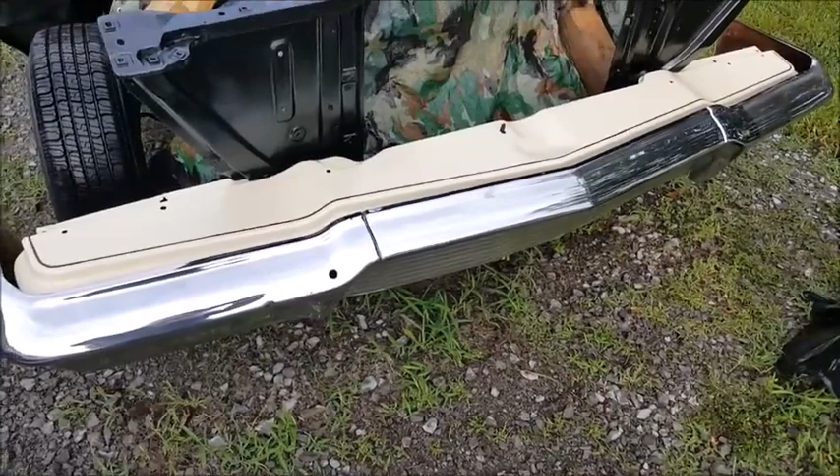Rained here in Middle Tennessee today, but a couple days ago I laid that valance off over in there. Oh, I just wiped it off there with the cloth. Maybe a little rain. But that's what we ended up with.

And we'll get that grill bolted in there in a couple of days. Get all energetic, enthused.

A lot of rain here in Middle Tennessee today, man, a lot of rain all at once. That front valance we was working on the other day, that's what we ended up with. That's that enamel with that one shot enamel painter on the valance, and that one shot lettering enamel there to run that stripe around through yonder. You know, just simple. We get that grill bolted on there, might make sense.

1963 Chevrolet Impala. And 1963.

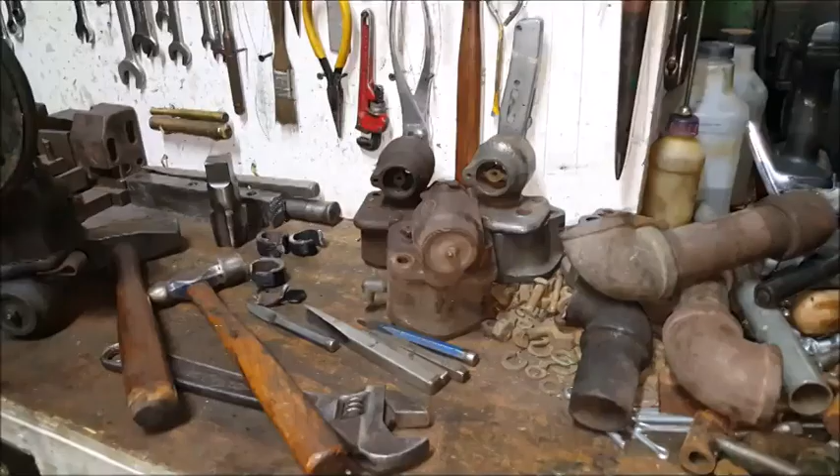Well, you know, scored them 3 heads up there at Tri-State, up there at Portland, you know. That's the remnants of them sawed off 90-degree elbows they used in exhaust system.

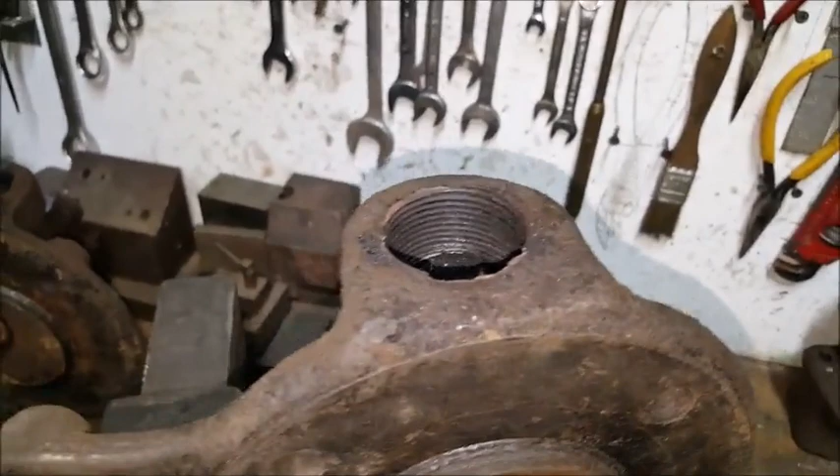And that's the condition of the thread there. Once I done it, had at it with that Cape chisel. I done run a tap down in there, 1.25 inches. But yeah, that's acceptable, you know what I mean? Right there, kind of kissed the side a little bit right there, but I'd still turn that in for grade, you know.

My little Cape chisel work here on the bench.

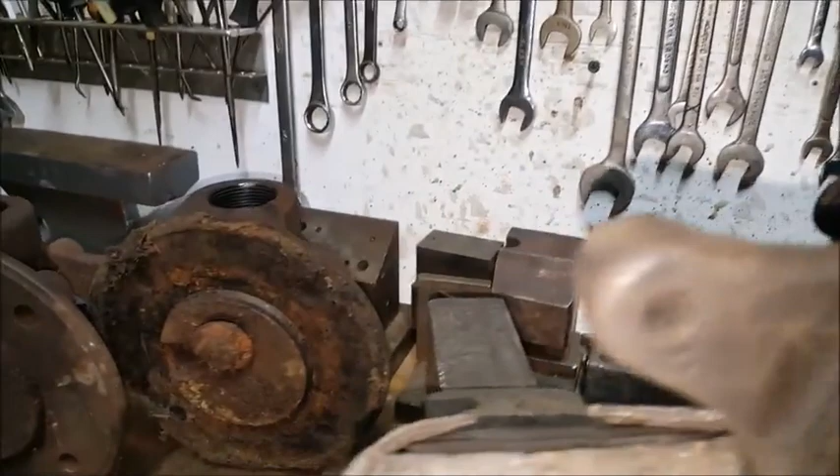Now we still have to deal with them valves. Now y'all come on back, we'll get to that. And that's what I'm talking about. Going to need a valve job times 2.

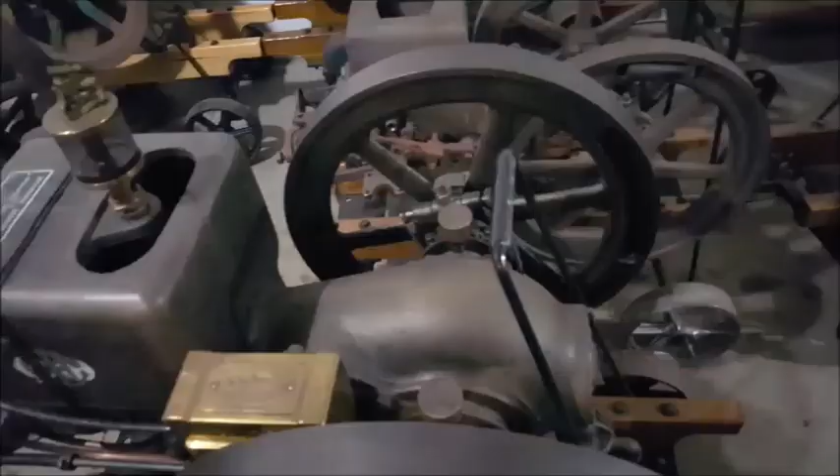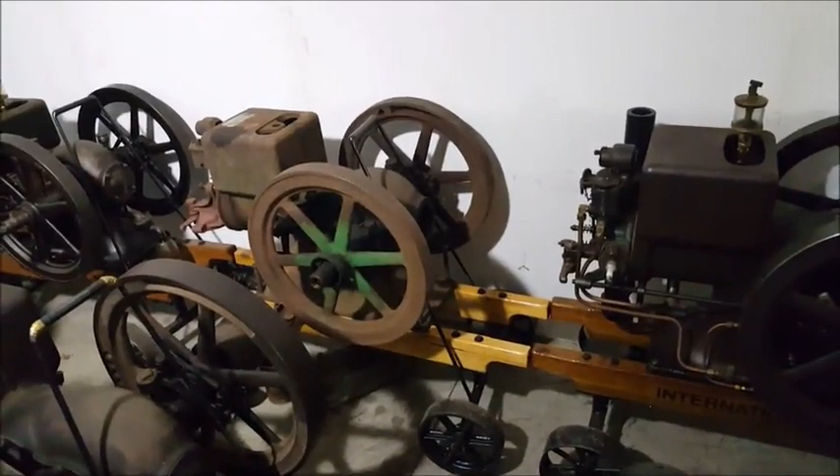I'm going to put this head right here. And then the next engine to come in is this, that right there. That's Tony's engine, Tony Bacon. You know, he done passed away last year or so. And Mike, he done already give me that engine right there. And you know, being Tony owned that engine and everything, I'm going to put it together. You know, that's a Tony Bacon engine right there.

A little 1.5 horsepower McCormick Deering. Now we'll have to get an EK mag to go on it. It ain't in too good a shape, but we'll get it running there. Tony Bacon's engine.

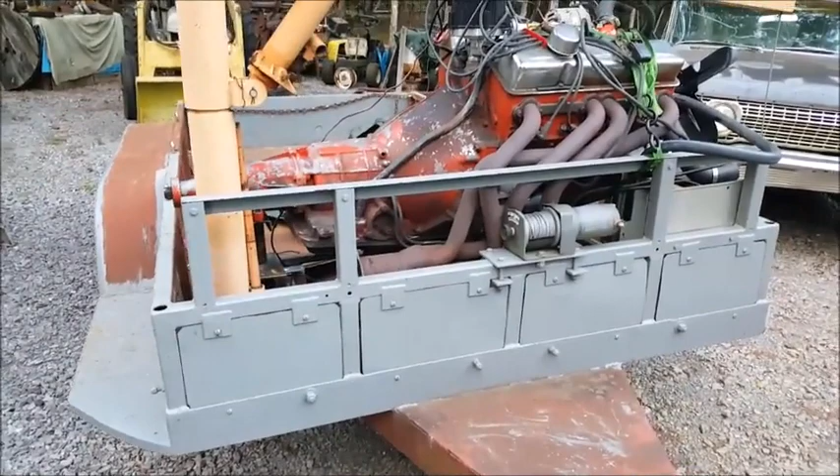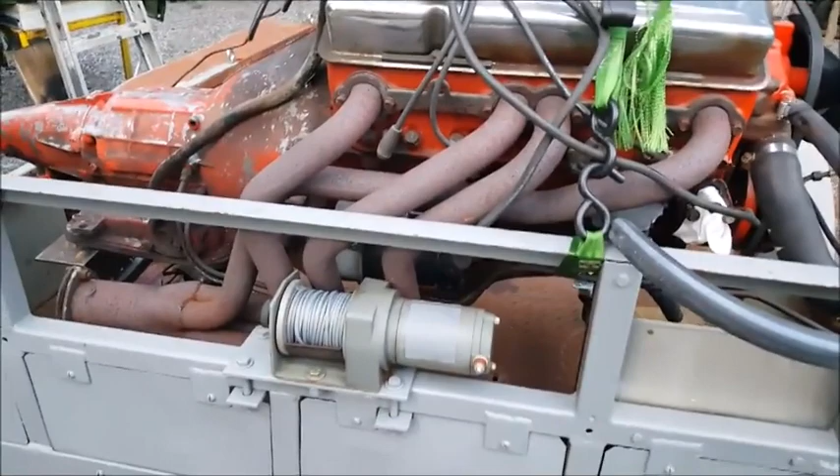Well, you know, just kind of the plan. It's 1966, Powerglide right there. That thing's got one of them engine and transmission combo there I done come by. I got some headers on it, which I probably won't use in that car. But it's got a long tail shaft on that transmission, and I think I need a short tail shaft on this car. I'm just thinking.

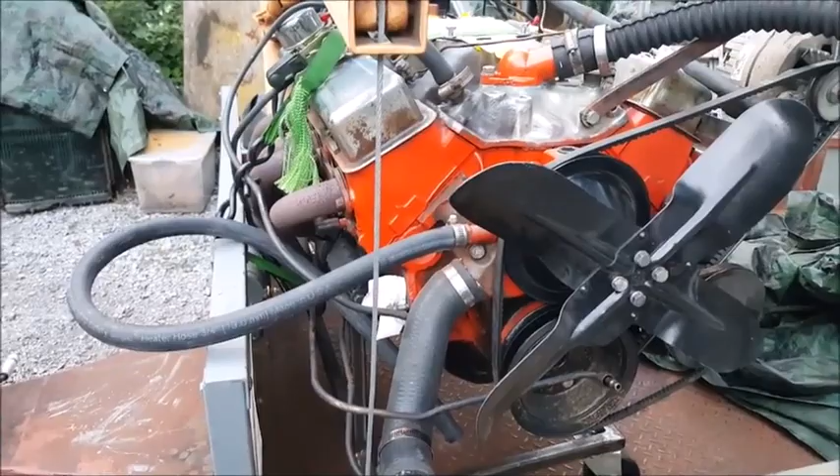Complete motor, quadrajet, aftermarket distributor. The reason, you know, to go in this car right here, 63 Impala, from here, Middle Tennessee, the geographical center of something. Shop dog sound.

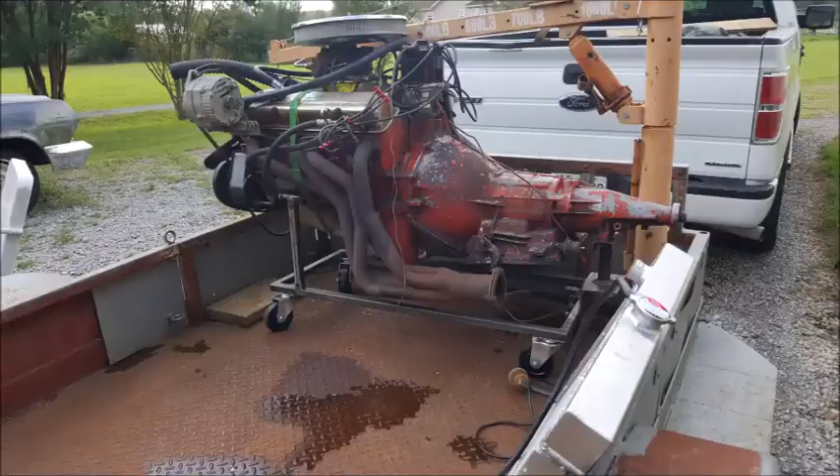Well, yeah, Power Pack heads, Matt said. The 283, we'll put off in this 1963.

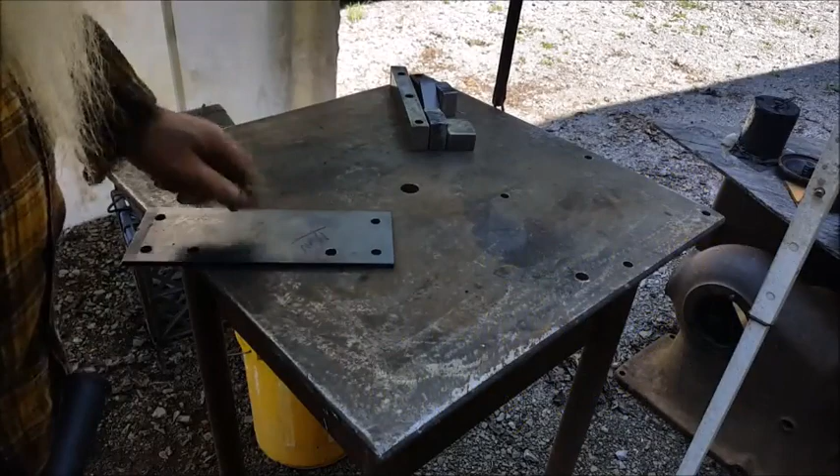That's that cold roll right there, 1/4 inch thick by 4 inches this way, 11 inches long on this particular piece here.

But wait a minute, I'll show it is what we're going to be doing here. There'd be 2 of these pieces. One has a hole in it for the pivot. And both of them has the hole in the back part there where you can put a tie down.

Two of them axle things, axles. And 4 of them, what you call them, but you would weld these up, grind them off, and then that would be the bottom of the axle.

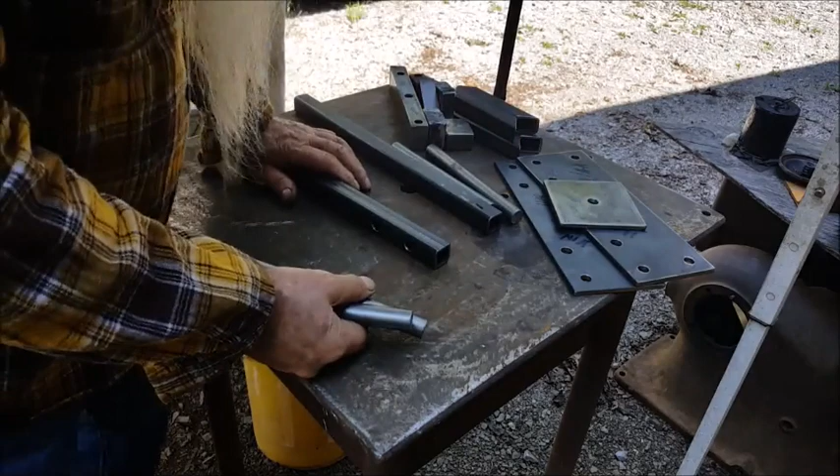That'd be the pivot plate for that. And then you get these axles right here, and the sole purpose to include this in the kit without going a different route and running a solid bar all the way across. Just extra time to do it this way, but I think the advantage is to be gained in practicing plug welding and grinding, metal finishing. That's the point of doing it this way, not to save metal.

And I did find out, you know, there's a burr in all these right here. So that's 11 gauge, and this is 3/4. It'll go in there, but sometimes it gets a little tight, and then you just, well, we'll do it. I'll show you, but you just pound it a little bit and weld one side, and then go over and do the other side. Best way.

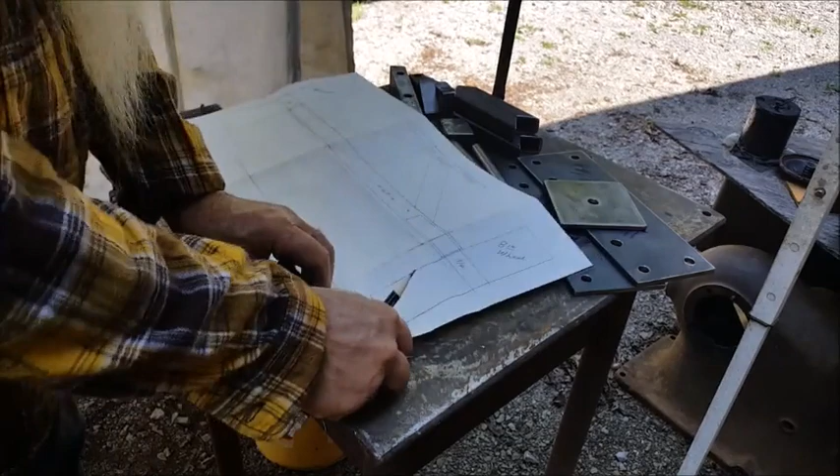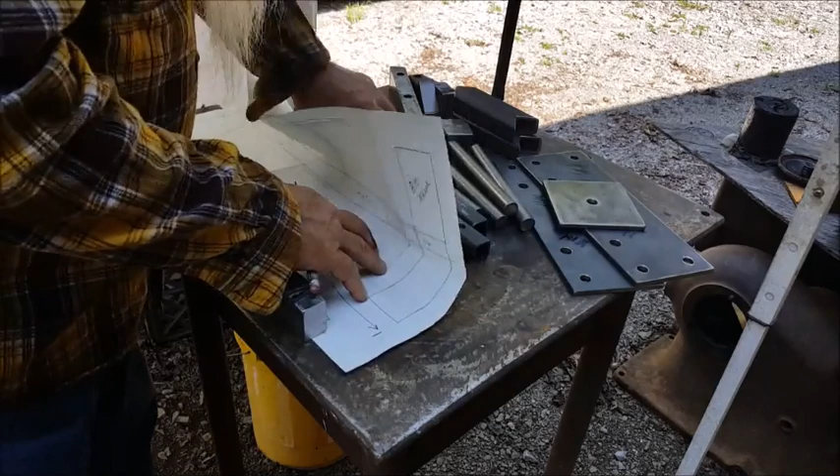Well, this is the schematic that I drew up back in '07. It's been the standard design since then. But what it'll come out to be in the end is...

This would be the axle, full-size drawing, and this would be the stub axle inside this tubing to this point right here, this being the wheel. So you'd press fit it in there with the wheel on here, cotter key installed. You press that in until it's a good turning fit, and then you weld these.

And it's the experience of the welding, ending up with a good product in the end, that's the beauty of this, I think. But that's the way that is.

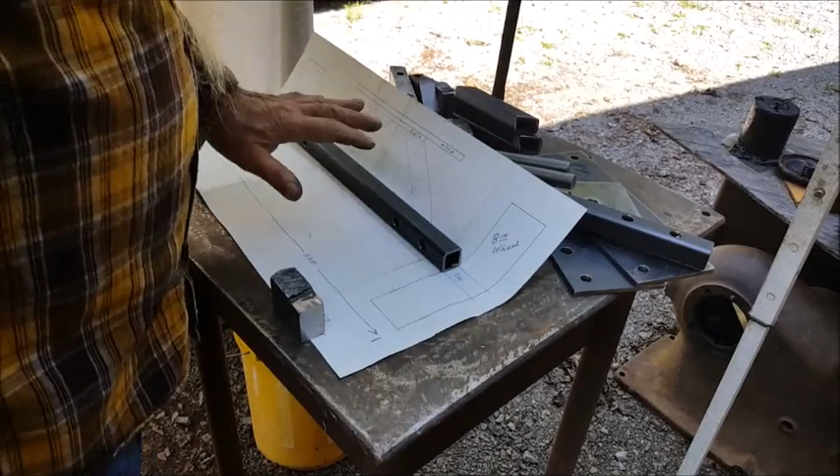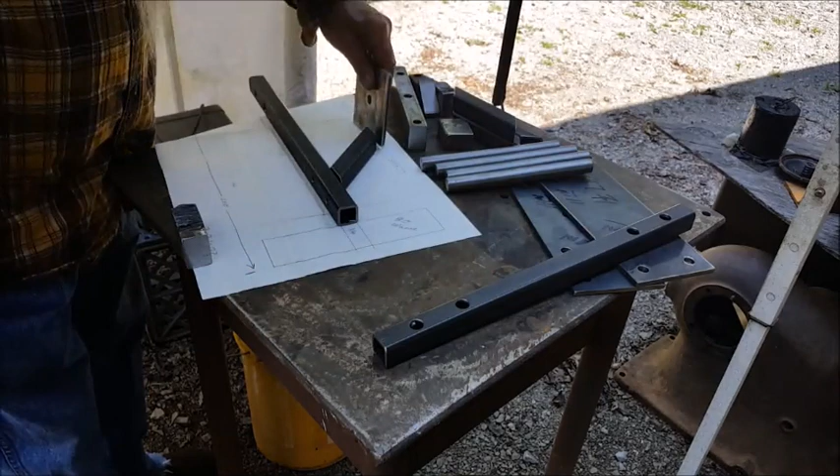Okay, let's show you. This one, being short, goes right here. And this on the shorter one, welds to this plate center line. So it'd be right there and right there.

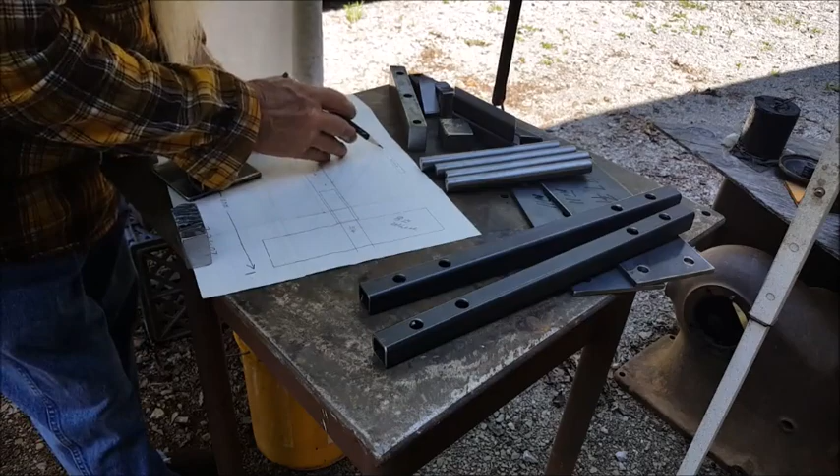Now, the measurement that's important here, let me stress it to you, is the center line of this wheel, the measurement here, this being this part, that being that part. Okay, and this being a quarter inch thick, and this being a quarter inch thick. Being this part right here.

This part, in this case here, this is a special build, so this is a little longer than normal, but that would go right there like that, and this would go right here, and you would weld here and here, affixing that to that.

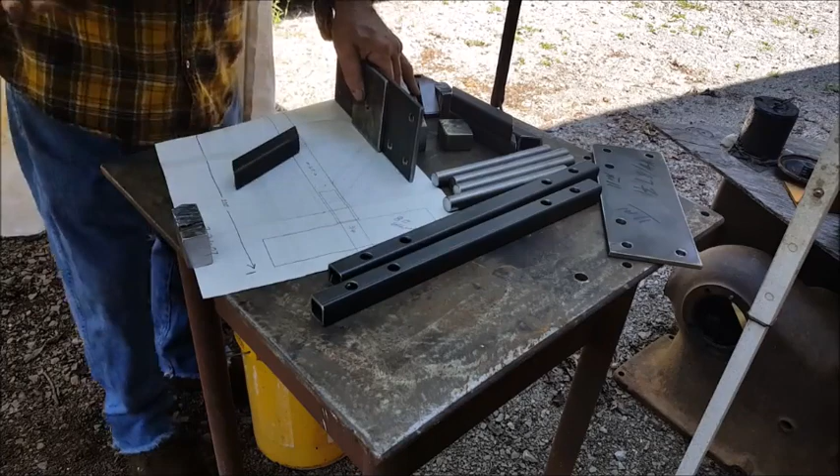The important number here is: measure from the top of this axle up to this part here, like from here to here. Get a ruler and measure it.

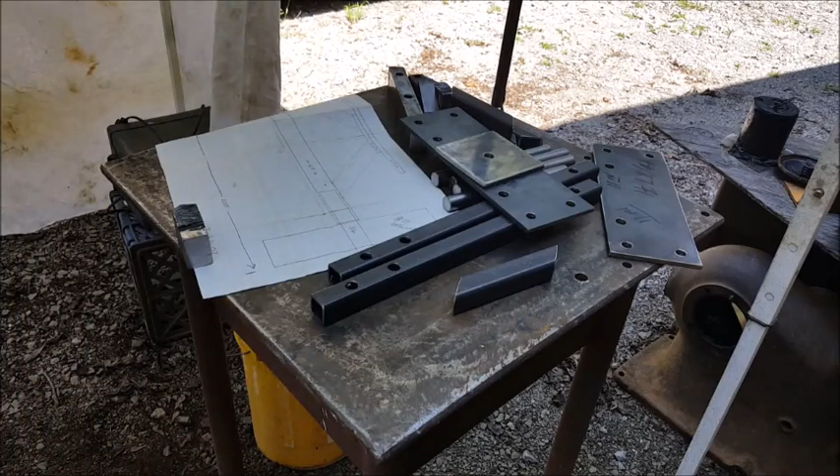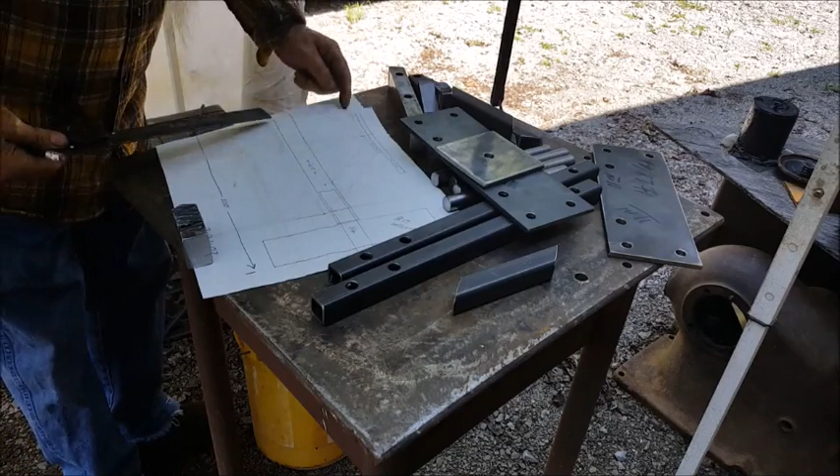So that being... well, I think it's so dirty I can't read it. It being 3.5 inches, and the rear would be 3 3/4 inch. So you want to maintain the distance from here to here, square. That will give you a clearance over here at the wheel of a quarter inch, so the front wheel can pivot and rotate underneath the cart without impediment.

So that's the measurement, it's 3.5. We'll get a measurement once we get it set up here, measure that and get it square, and then when you put this onto that piece of metal, if it don't come out exactly at the angle, maybe a saw cut blade difference, you'd have a little gap either front or back to maintain the distance right here to make this come out.

Okay, the reason that's not a problem is it creates a nice welding gap, makes the weld a little bit stronger with a bevel on this right here.

Another tip I may offer: when you're welding onto this quarter inch thick metal, you don't want to mount this to a heavy backing plate and then weld this eighth-inch stick to that, because this right here will act as a heat sink, and you won't get as good a weld. You want this to be spaced away where it don't absorb heat as much.

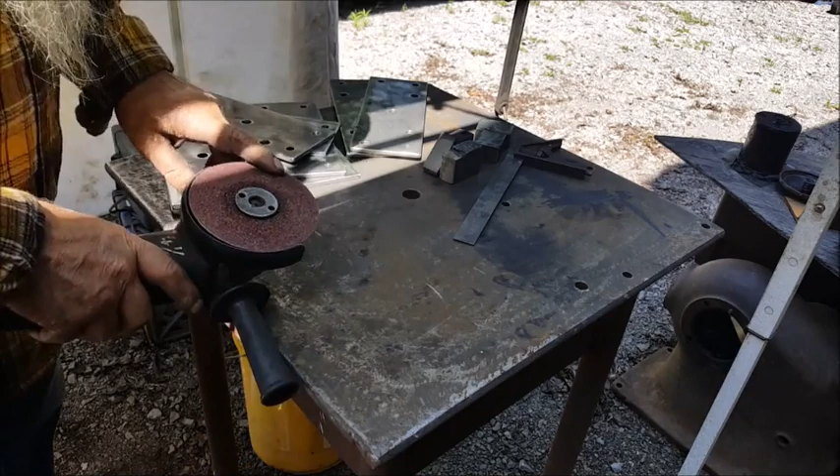Well, what I got's a big old piece of angle right there. Everything else just jigged up, an inch and a half tall right there to make everything come out on center. From the edge of this right here to the edge of this axle right here is the same distance apart, same distance up and down. Over there it's the same measurement as this side over here.

And them pieces in there, you know, you can put them wherever you want them at. So I'm just gonna put them right there. Angle is really good, very weldable. I'll show you.

Now we'll run a bead around there, flux core wire, about 30 thousandths. That Hobart handler, it'll get the job done. Striking arc.

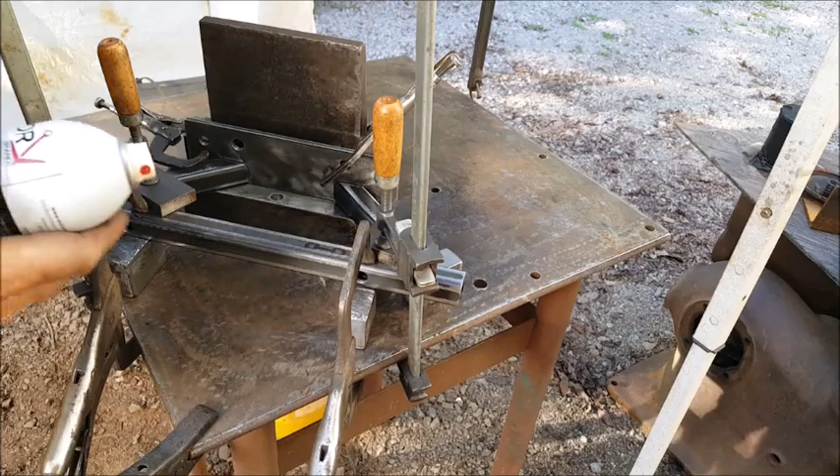You know, before you start welding with that flux wire, if you spray everything down, that's that Anchor right there, Anchor brand anti-spatter. It works good for me, I got no complaints with this brand of stuff.

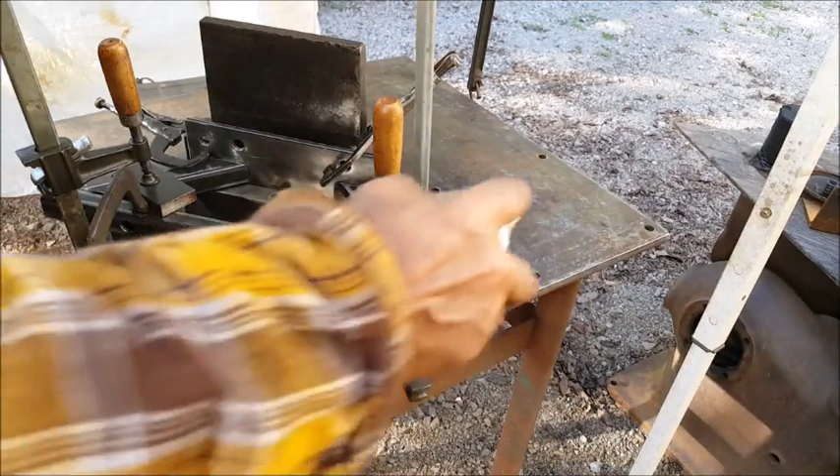Well, yeah, we'll run a couple of beads in there right now.